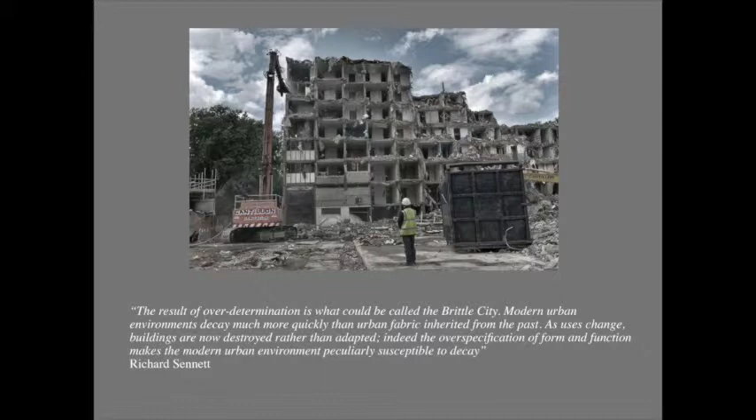So if you like, there's this restless energy, this hunger eating up the city, giving buildings that are fundamentally durable a very short life.

And because the value of the land always trumps the value of the construction on it, there's a sort of thriving trade in hypothetical constructions. What developers say is that every building is a failed development deal, because what they'd really prefer to do is buy a bit of land, get consent for a bit more than has already been consented, flip it on, and they've turned a profit. So of course the moment they dread is that pass-the-parcel moment where it actually falls on them to have to build out a scheme that has all the fantasy of the market, but not necessarily the economic basis to happen.

So, London, you could zone large areas of London. It's this sort of opportunistic model where there's no rules. If you work in France or in Spain, they give you the gabarit, this theoretical volume, or the plot ratio, what you can put there. Here it's whatever you can kind of blag, whatever you can persuade.

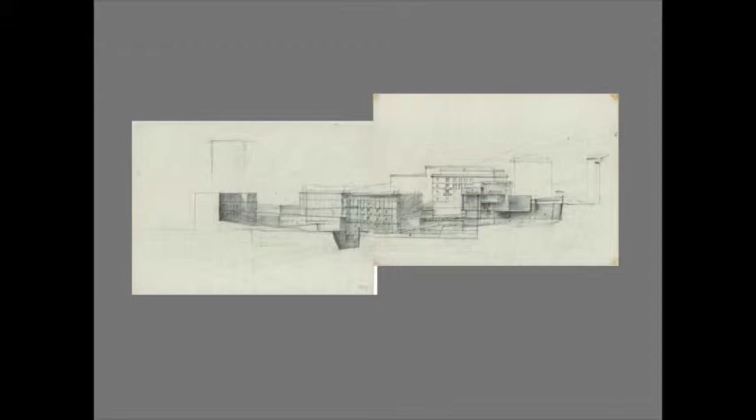In sleepy, semi-detached Cambridge, Dalibor Vesely, exile from Prague, made us believe in the city as a kind of vessel of common culture, and in this idea of architecture as a vehicle of city-making, and this sort of power of the intangible, of the cultural.

On a year's exchange in Harvard, I had this abrupt encounter with a kind of Mediterranean rationalism through Rafael Moneo, preaching this metaphysics of structure.

I had one particularly humiliating crit where he made me pin my plans up. I'd made the mistake of doing them on trace, and he made me pin them over each other. My columns didn't line up, and I had a clever answer - I said, there's a transfer structure.

And he said - which was actually a bit of a refrain from my time in Harvard - you cannot do this. He said you cannot treat structure as decor, which is certainly a habit I'd absolutely imbued from Cambridge. I've never forgotten that lesson. I think it was a fairly Jesuitical education for an Englishman.

And then graduating in the teeth of the 1990s recession spared me, I suppose, the illusion that I could translate some easy dream of the European city within the confines of London's architectural world.

I ended up doing odd jobs in archaeology, digging at the city that Akhenaten built, Amarna. He built it in 4 years when he decided that Egypt should be monotheistic.

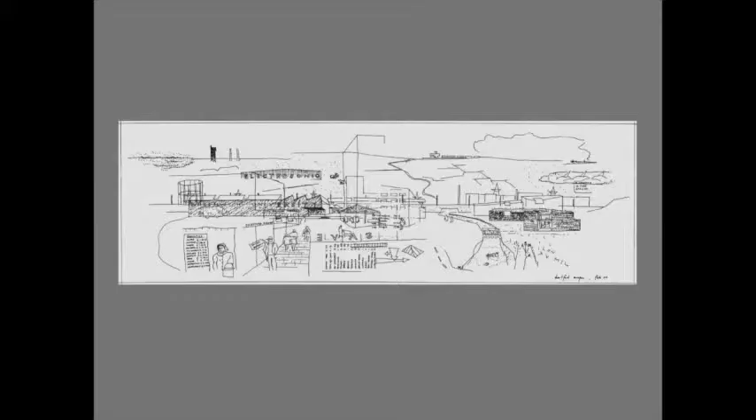I suppose our first projects—this was the first Europan project we did, in Dartford. We won it, and then we went to meet the local authority in great excitement, and they said, 'Do you know who owns the site?'

These were real kind of responses to this. They were going to build a university, an extension of the University of Greenwich, on the old Joyce Green Mental Hospital out in the marshes. So we said, oh no, put it right there in the centre.

There's this idea of reimagining the station, reimagining the life of the town, relocating the town hall off its plinth beside the station into the market square, and then a bit of housing on the side by the river as well. So it was this robust and pretty ambitious response to rather febrile settings—just a sort of crappy, neglected town with sheds—so it's a bit of a tightrope.

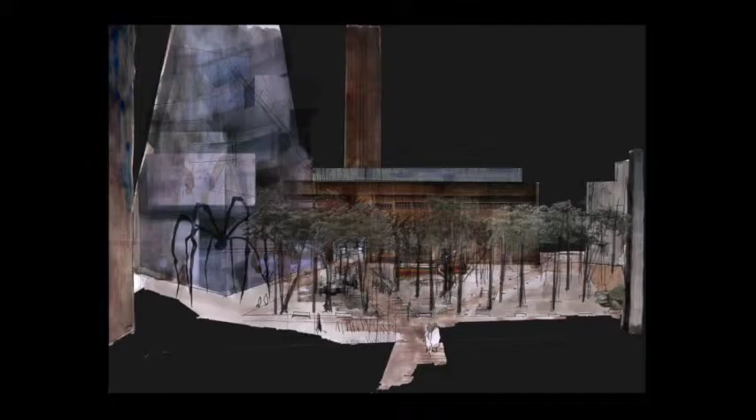A kind of prefiguration—so rather than being an empty plaza in front of the Tate Modern, the idea that this would be almost like full, and that the turbine hall space, this amazing void where installation pieces are placed, that's the public space.

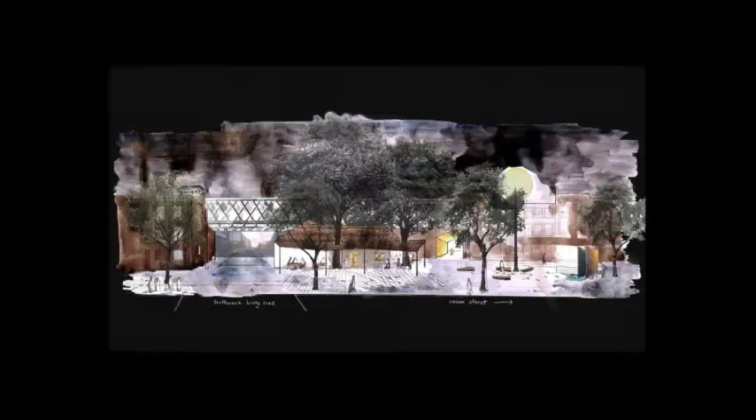Proposal for the viaduct arches to become a combination of small business space and small-scale cultural programme. And then this project for a little neglected, leftover triangle of space, carved by the railway viaduct, which you can see in the background.

The Victorians were so terrified of any form of public gathering. I think actually public gathering was banned between 1848 and 1871 or something, and that's the significance of Speaker's Corner—it was the only place where you were able to gather and speak your mind.

Their way of avoiding having any public space was to build little public toilets and tank traps and monuments, and that's why the fountains are there in Trafalgar Square, to make it harder to have demonstrations there. So this little public toilet building was a legacy of that regressive project.

It's since become a cafe, and it's got these two magnificent plane trees growing up through it. Our project was an element of taking over, closing a road, opening up the public space, and then a little canopy—this fantasy, this capriccio of the cafe as a kind of woodland hut.

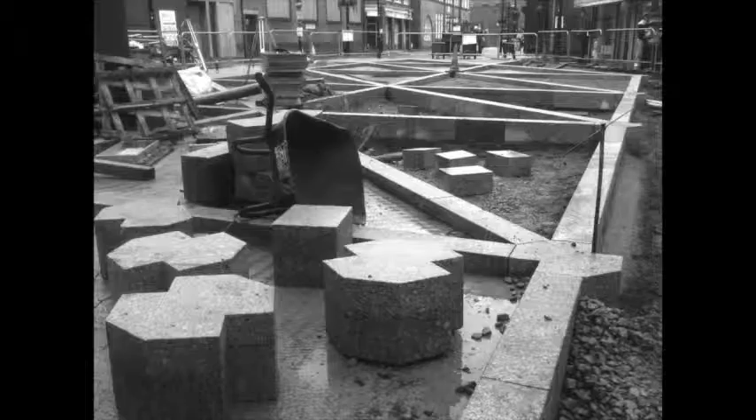Translating this—I suppose it's the geometry of the space, the geometry of the viaduct—these echoes into this diagonal grid that structures the paving of the space.

I suppose there's an element here of negotiation with people, and of course negotiation with the material and the physical. But there comes a moment where you can't just be defined by everything around you. It's then this sort of moment, you need to find a moment of strength. And you can see here, if you want to make a durable public landscape, stuff has to lock together.

It's not an assembly, it's not an Airfix kit or a kind of Meccano set that you bolt together and it's strong. Actually, you have to sculpt and craft things if they're going to be strong and durable.

And these figure-of-eight pieces are the kind of place where this geometry, this responsive, moderately supple idea, actually turns into something that has a strength and integrity of its own. We've realised, if you like, two parts out of the four parts of the project.

The paving and the canopy - I've done them in, I think, two completely separate years even, which still leaves a bit of the light and the public seating to build.

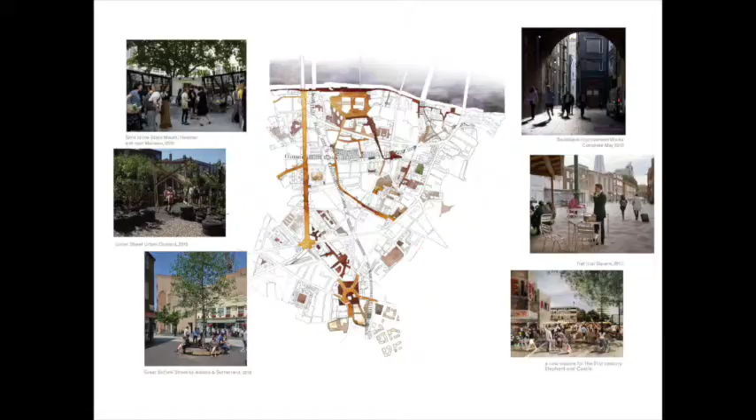And we've struggled to find a name for this approach. We've used incrementalism, but someone said, well, that's already identified with a kind of practice in the third world, or other things. You could talk about negotiation and the imagination, but then it all gets pretty tangled. The danger is it all sounds like it's just sort of moderation, and we just sit there and moderate and arbitrate and make people tea, and then the project happens.

It isn't like that. There is this sort of element of suppleness and bending over backwards - that's the spineless bit. But there is also this element where you push, and you've got this many constraints, and it has to take on a kind of force and a strength and an integrity. So which is where I kind of turn to the Sage of Springfield, and I think the best definition of what we're trying to do, how we do it, both in human terms, in social terms, and in physical terms - it's feisty but spineless.

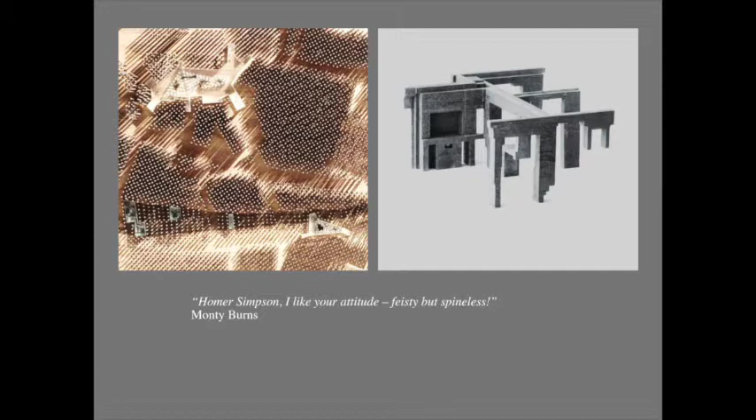And I suppose this is probably then perhaps the ideal kind of skill set - London has been our playground and our school, where we've learned to transform what we found, and turn its formlessness into strength, but also taught us - we've learned the lesson how not to be bullied by the English establishment, which was a very valuable skill when we came to build the castle.

It looks like this sort of pastoral England, beautifully escapist, uber English.

And that's the sort of elegiac tradition of English ruins. I mean, pretty much all of them, the ruined abbeys and ruined castles, and this has got one of each, are the result of a kind of ruthless and powerful process of state formation.

This parish church is the remaining quarter of a chantry church established by the Grey family and dissolved by Henry VIII. They ripped off the lead roofs and sold the lead. The nave stood for another 50 years, and then someone just thought, well, this isn't going anywhere, and pulled it down and built a small tower.

So that's why it has this strange proportion, very tall for a short parish church. That comes from that act of wanton destruction and Henry's centralisation of the state and sidelining of the church as any kind of rival power, economic power or authority.

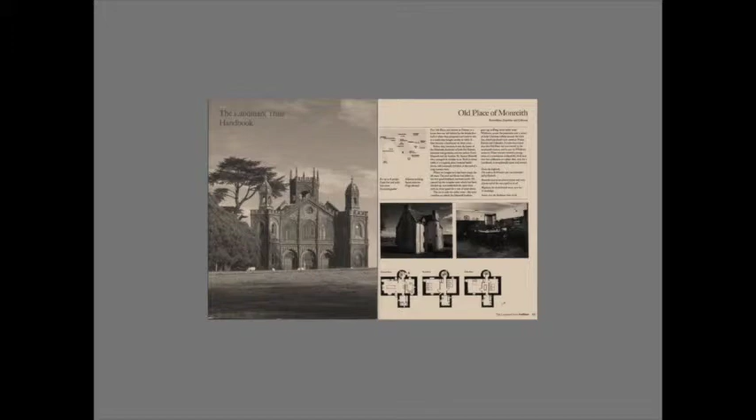Some people say, okay, this is like holiday housing for posh people. Landmark Trust would say it's about £30 a head per night if you fill every bed. It's actually a very congenial and interesting way to share a historic experience with friends and family.

This is just to spin you through the evolution of the castle. So it started off with this sort of keep, a fortified manor at the end—probably the beginning of the Norman period, with 2 metre thick walls.

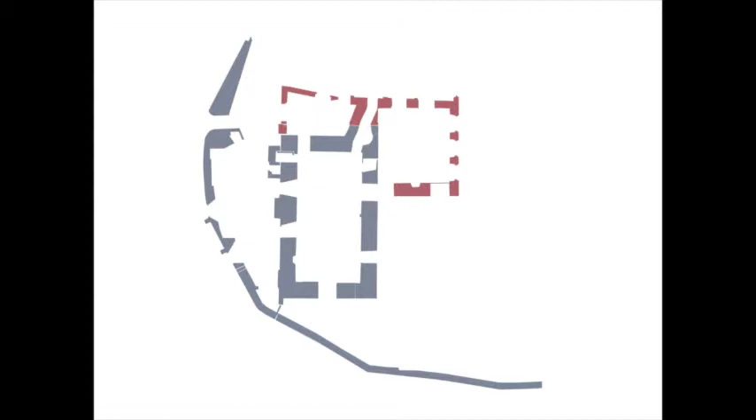This is the extension by the Grey family in the 15th century, sort of Gothic, then added to in the 17th century by the Chamberlain family who took it over. One part is more in the Elizabethan prodigy house style, and the bit to the north was all half-timbered, jettied construction.

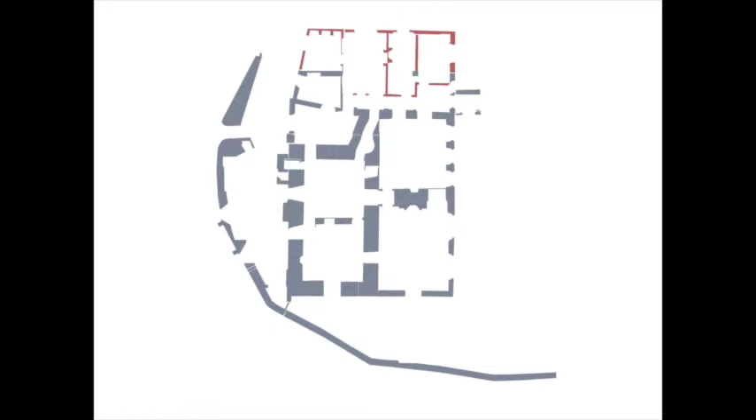People liked having long galleries then—it was very fashionable. So they built this half-timbered, cantilevered glazed gallery, which, as you'd probably not be surprised, was in very poor condition when we found it. This part here is an expansion from the 19th century.

And when we came to it, it was this sort of empty shell, and we focused our brief on a 4-bedroom house, big enough to fill about a third of the castle. We took the decision, fundamentally in a spirit of continuity, that the core from which it had grown would be the core that we would inhabit.

It had bloody big gashes in it, these giant gaping holes. We built a sketch model and tried it out, and you can see the scale of the 15th and 17th century wings is much more congenial to living in. But we just felt no, that continuity, that core trumps everything. So that's where we located.

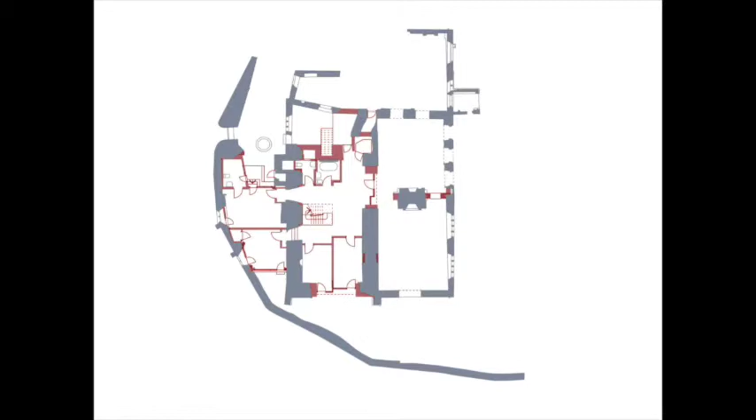And as you can see, the bedrooms and bathrooms are on the ground floor, and then we take a big hall on the first floor for living, dining and kitchen.

This is sort of more or less what we found, in the sense it was almost fully intact in places. This kind of proud silhouette, this very kind of clear structure. These sort of strange orphaned structures, and remember that fireplace because you'll see it again.

Orphaned, and I think actually our first response was to knock it down in the competition scheme, which couldn't really see its point or what it was. And someone asked us, took us aside and said, perhaps you could reconsider that. I think it's quite important.

You can see just this sort of, I don't know, where does the brick stop or the stone stop and the rubble start, or where does the ashlar stop and the rubble start, and where does the rubble stop and just a sort of mud and debris.

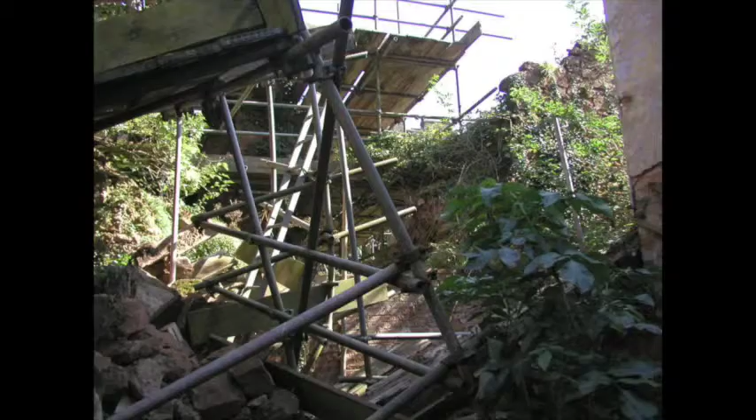Something that, you looked at it from one angle and it was a ruin in the grand tradition. You looked at another angle, it's just a sort of chaotic pile of stones. And this is actually as we found it.

So, in a way, what we've done, which I'll come to, has this wonderful quality of feeling self-evident. It wasn't at all self-evident. That's what I'd like to say.

We had this sort of grappling, teetering kind of chaos that we had to first imagine cleared, opened up. To make it safe, we had to demolish quite a lot. To demolish, we had to have planning permission. To have planning permission, we had to do a scheme.

So we had to do a scheme on kind of sketchy knowledge of the detail, and I have to say, to their great credit, the heritage bodies consented this sketchy scheme and allowed us to evolve it and refine it and respond as we went along, rather than forcing us to build what we had consented, because that wouldn't have been great.

We, in this sort of ruptured tradition of continuity, evoked some Mediterranean references, which, because they weren't party to this, weren't part of this focus on restoration for the Landmark Trust, this seemed, even just pulling these pictures out of books, quite fresh to them. This idea that actually these things, the centuries, could just coexist comfortably and directly.

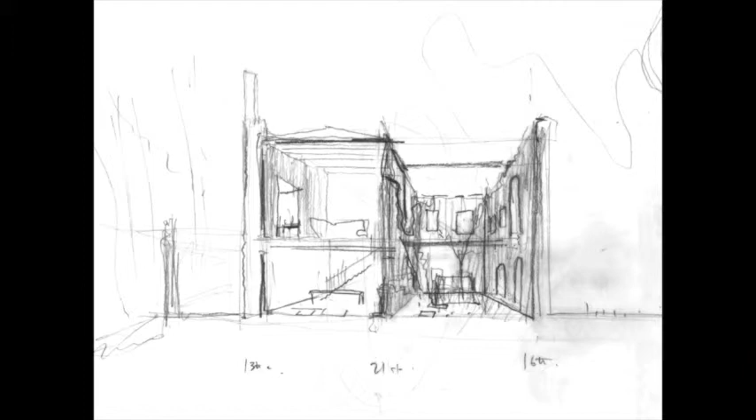Our initial idea was you put almost half a house, a house in half of the castle, you occupy that oldest part, and then the newer 15th and 17th century parts, you leave open to the sky as kind of open courts.

That evolved into this. This is then just a working model, sketching over it, just starting to imagine, not just the textures of it, but the rhythms of life in it.

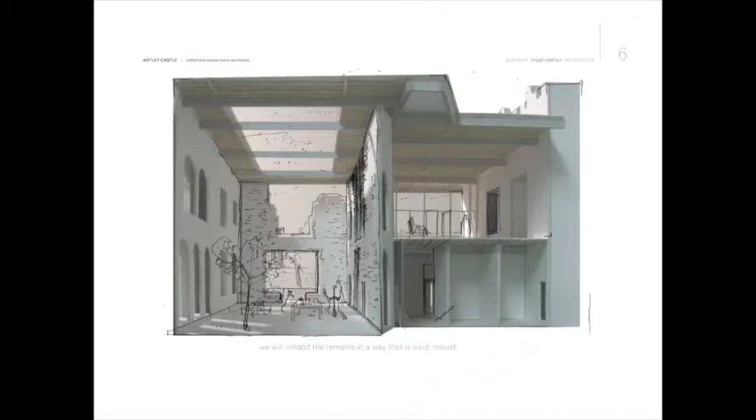This idea of that as a courtyard where you dine, which would actually have these shafts of sunlight coming through it. This idea that we'd actually, which came from our structural engineer, he said, if you want to protect it, you should roof it. I said, I can't roof it, it must be really horribly gloomy. So we settled on partially roofing, like a cornice, keep the weather off the walls, but then actually bind it. And this was initially the idea of doing that with concrete beams.

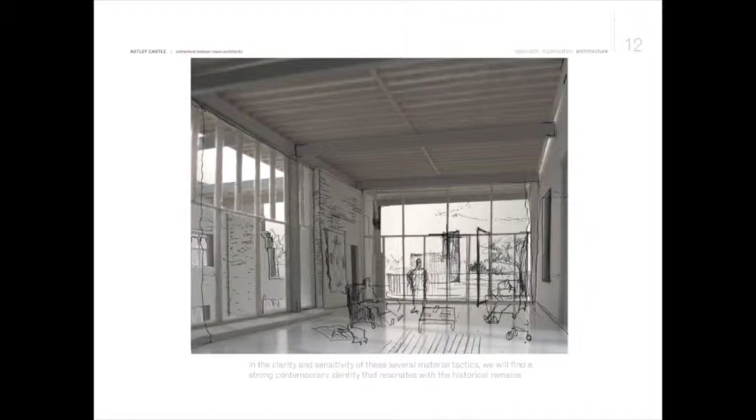And this idea of that first floor hall, again, as this big, messy, tolerant space, child scribbling on the floor, the sense that actually it would be, I suppose, where the medieval idea of living and the modern idea of living kind of come and approximate each other again.

So the scheme as we presented at a competition, which in many ways didn't change a lot, but in the ways it changed profoundly.

So if you like, we were having to almost mentally undress the ruin, clear away this rubble in order to come to a kind of proposition.

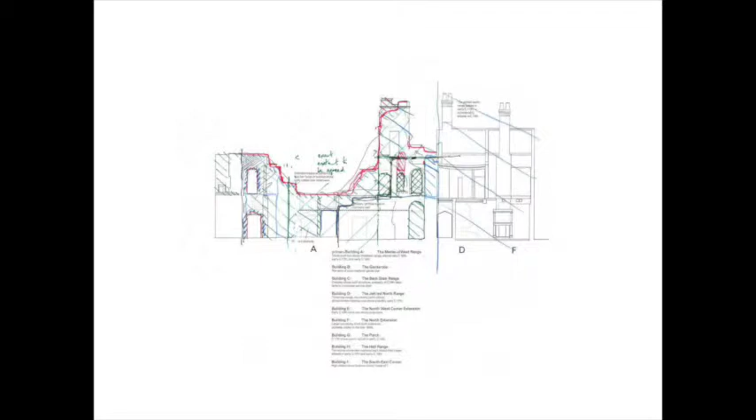This fundamental idea that the new construction would stabilise, would buttress and tie the new construction to the existing construction. And this is in its simplest form, almost just a sort of concrete T that just binds this rotten tooth together.

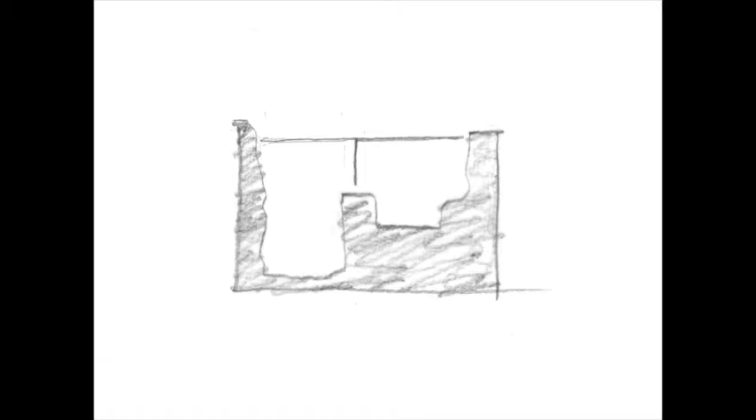And it was strange because it was exactly this, the fact that then the past was dependent on the present that gave us our real kind of liberty. Because normally it's a question of what am I allowed to do? We've had conservation officers doing a drawing and saying that's what I'll let you do on other projects. Here, both because they were desperate and they knew it was about to fall down, and because the past was dependent on the present, we had a totally different setup, totally different kind of liberty to actually reflect on what the integrity of this thing was.

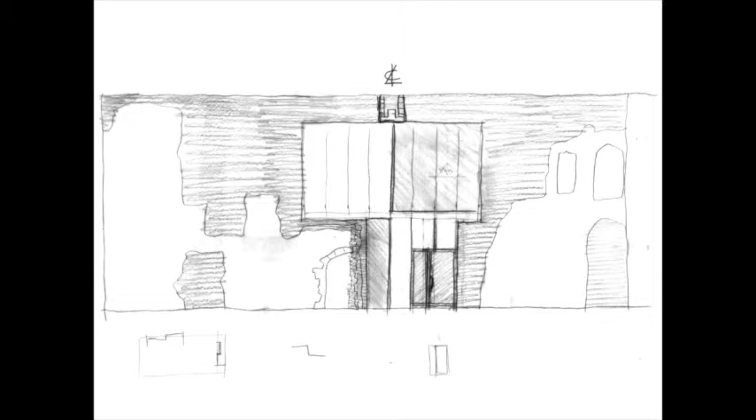So it became a kind of question of negotiating, not negotiating with other people, but negotiating these found conditions, a kind of random broken edge here, a remnant of an arch there, a collapsed wall here, and finding something where the principle was we do as little as possible. We build as little new construction as possible, but nonetheless that finds, it's almost a struggle with formlessness. And the answer is not some strong form.

The answer we proposed was something in between, something that's got that kind of hybrid, complex form. This is a question of negotiating even just plumb, what's vertical? The walls are doing this. And this question of, which for probably about 3 years we ignored, we didn't even think of. And then suddenly we were on site and having to say exactly which line we're going to put the walls in.

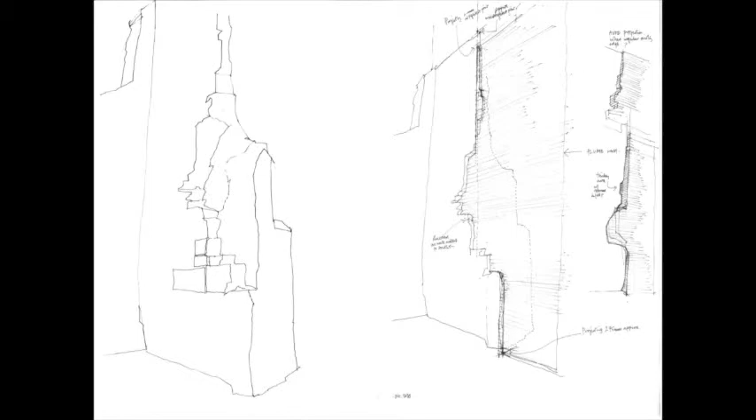So coming up with the principle that the brick always sits behind. We did look at the idea of actually the brick following the walls. So negotiating, I suppose, yes, and then these sketchy, blobby people, a primitive form, but a kind of powerful form of empathy, trying to imagine.

So it's not all, there's an element of structure, there's an element of diagram, but there's an element of experience. You have a memory, you have these memories of staying in places of shared living, and just trying to imagine these moments of empathy, trying to understand how an atmosphere, a behaviour, and a kind of texture start to reinforce each other.

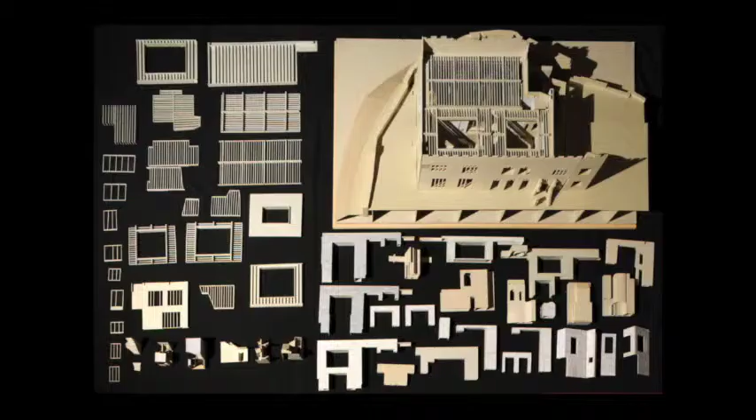This sort of slightly pathetic array of the graveyard of failed options and things we explored. But I suppose what I'd say is, we negotiated it through drawings and models. Drawings, for me, are a thought in action. You think it, you have a blank piece of paper, you don't get some sort of CAD file.

That has 65 layers and 10 times as much information as you need. You start off with a kind of absolute minimum, and then with this economy of the line, you can find it. You find an idea, and that's what's in each of those preceding drawings. The model, however, is a fantastic tool for testing, and that's exactly what we did with this.

I wonder what we spent 5 years doing, but a lot of the time we spent arguing about how the solution that worked in this place would find a corollary or appropriate family resemblance in another place. It would never be a question of finding one system, one answer that fits all. Every moment we felt we'd nailed it, you'd come across a new question. It's a dialogue, a negotiation between different approaches and personalities, but also a dialectic through which we worked with all this concrete material, these friable edges and weird geometries, trying to turn that into something with coherence and deliberateness.

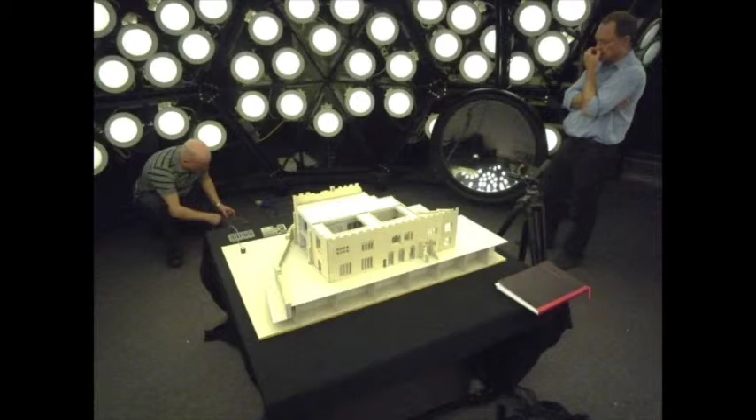We took the model to the artificial sky at University College London, attached a lot of diodes—it was like taking it into an operating theatre, wires and diodes attached—and measured how much light there would be in various spaces, what the daylight factor would be. It was actually very useful; the numbers were moderately useful. We could say, okay, there's a daylight factor of 5 in the hall.

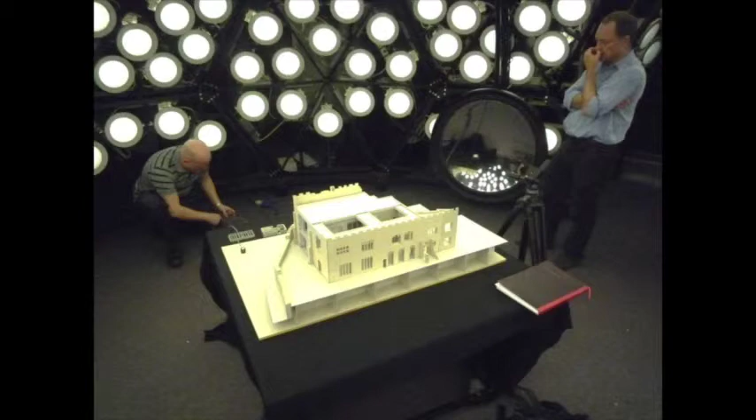Don't worry, it won't be gloomy. It's a castle—what do you expect? Castles are meant to be gloomy. But we managed to offer some reassurance with, I don't know, you might call it pseudoscience. What was actually very interesting was having the technician's knowledge of daylight—that's the difference between a software model and doing it in person. He talked about transitions and the grades by which the human eye adjusts between different light levels. You don't want abrupt transitions. So we came to the view that maybe these partially roofed courts would ease that transition from bright sky into gloomy interior, rather than hindering it.

In a way, it's like building a modernist patio house with an ancient Gothic brise-soleil. We realized that because we had a house at the core with this perforated wall around it, it would just be like a giant sundial, with the light animating and stirring this collage of the centuries.

We used the model to test finishes—the 1 to 50 model finishes, the detail. We recorded this in a book.

Having worked enough for the English establishment, we realized we had to give chapter and verse—tell them exactly what they were getting, exactly where, and exactly why. Rather than being hit by a wall of rejection—why aren't you using oak, why aren't you using veneer, why don't we paint the walls—we anticipated that and used these images. Then they'd say, oh, but you've left off a beading there, it's very important you put that on. They thought it was some fancy computer model; they didn't realize it was just a crude old model you could stick your head into. But it did the job.

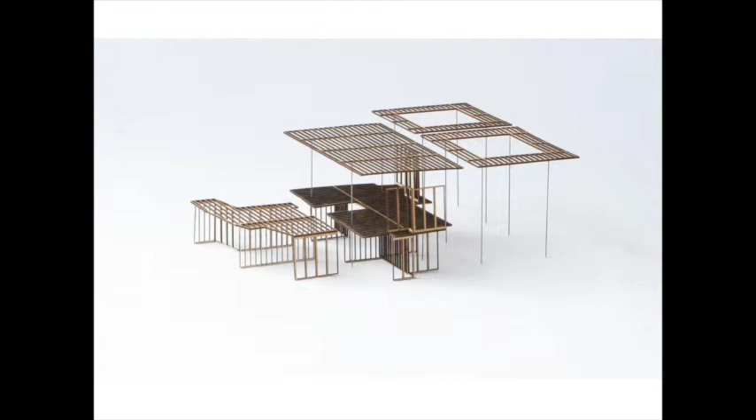So where the kind of masonry armature keeps it sublime, keeps it ruinous, keeps it kind of these big gashes, it's the job of the carpentry and the joinery to kind of give it measure and warmth.

We selected a Danish brick because they could deliver. They're 35 millimetres high, so very fine, like a kind of Roman tile brick. We tried out another one which even we quite liked the colour of, possibly even more, and it came in 45 millimetre modules, and even that 10 millimetre difference was very strongly palpable in that encounter with broken edges.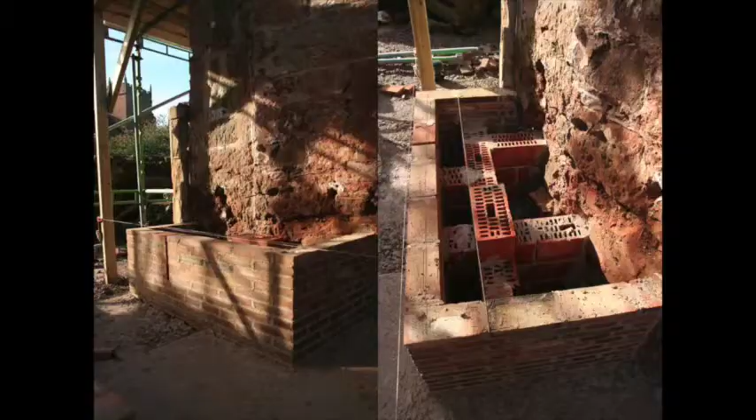So I suppose you have to make a decision based on a couple of dozen bricks piled up against the edge. But I tell you what, it's a lot better than thinking you can make that decision based on a bit of paper back in your comfortable office. So there was a lot of testing on site that we went through to explore the decisions, or to underpin the decisions.

We did a sample panel of the brickwork before. This is actually one of the first piers going up, so you can see it's like a honeycomb, hollow, but with a series of clay block diaphragms, and inside this is, I think, Belgian snelbouwsteen, fast building stone clay blocks.

We chose that because concrete and brick expand differently, so we wanted to have a greater thermal consistency. So they are these sort of hollow, deep but strong elements, backfilled with aggregate to bind them back to the existing broken edges.

The diaphragms are bonded in every 5th course or something, so these headers — here, this seam of headers is where the diaphragm is bonded into the facework.

It's a quarter lap bond. A Dutch architect wrote to us and told us what it's called, but we said, oh, is it really? We just sort of drew it until it looked like it worked, and we drew a lot of different variants of it. I think we called it a Flemish garden wall bond or something, which I don't think exists.

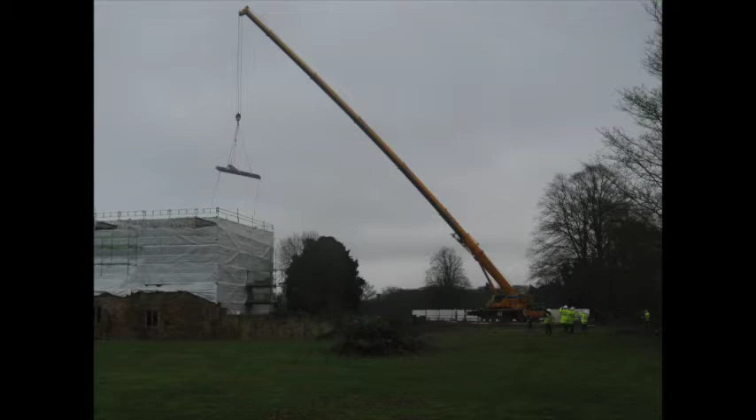So this is the lintel. Of course, there's a moat, so you can't just crane stuff in very easily. So this is a temporary crane at the limit of its capacity. I think Chris did the calculations several times and certainly spent several hours on the phone trying to persuade these people that they could in fact do it.

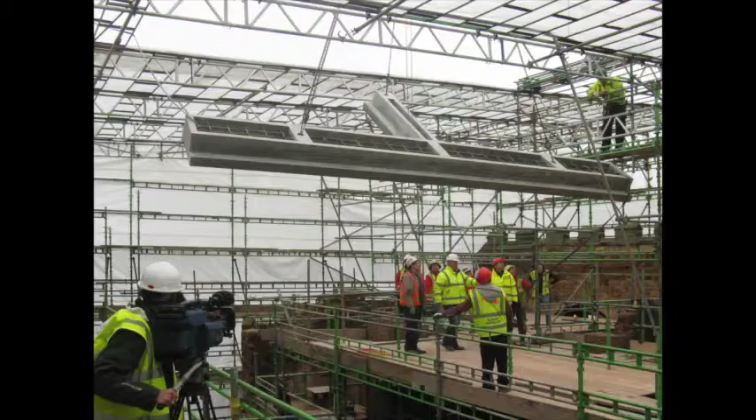It's a hollow lintel, you can see the kind of ribs, so it's basically almost like permanent formwork. It's a 7.5 metre long concrete lintel at full stretch in order to keep these gashes, with the BBC West Midlands cameraman in the foreground there. And that's the bit that, if you like, ties the heart of the house together.

The lintels bearing on other lintels, or beams bearing on other beams, it's very much a motif of Paul Robbrecht's work, Robbrecht en Daem's work. When we were finishing the Whitechapel, we were detailing and refining this project, and we would go around, and I suppose we realised what he had done on this project.

These sort of very simple rooms, each with this powerful kind of transgressive gesture. There's one — my favourite gallery is the first floor gallery where there's just a doorway punched into the corner of the room, so it goes around that corner and goes through.

You can't hang works there because it's the corner, and it's a sort of beautifully subversive gesture. It kind of attacks the architecture and encourages this diagonal movement. So reflecting on this, I kind of built up a whole idea that this was Paul and Hilde working with this idea of Gordon Matta-Clark and his attack on architecture, and I got very carried away with this, and we ended up with this solution.

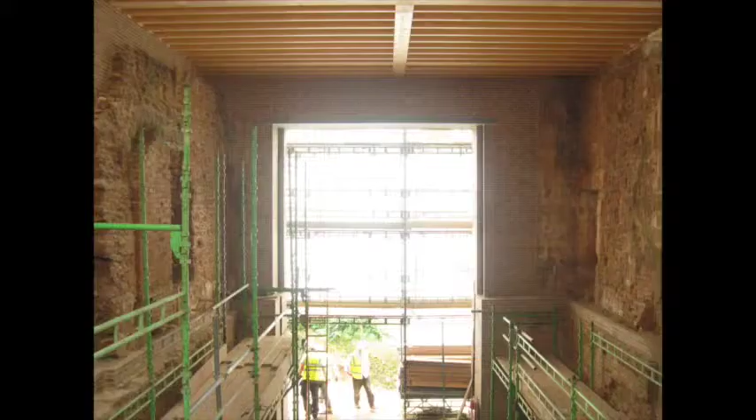So keeping this sublime scale with this masonry construction, these big concrete lintels, a dozen conditions where I suppose this sublime scale isn't appropriate.

Top left, the lift opening. In the middle, the kitchen, how you fit a kitchen in a big medieval hall. This is an idea of a medieval fireplace, where you have the hearth and the range, translated into a kind of diaphragm construction.

This is actually like a cantilever staircase, so each lintel bears on each other. The engineer came back to us with a lintel bearing on the next diaphragm, and then this little bit of fakey cool brickwork, and we said no, it's got to work. It's got to actually carry the weight, otherwise we don't want to do it.

So this thing, on the one hand, it's a very clear, simple structure. On the other hand, every encounter, every junction requires a modicum of improvisation.

Even including when we were on site, finding out how you fit a window into what at first pass, in the gloom and rain, had looked like a passable window opening - and it isn't.

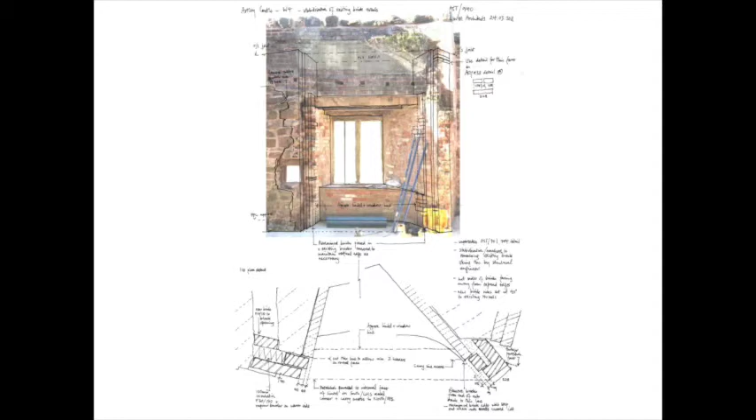And this is when we even started using reclaimed bricks, because our bricks were not the same size as some of the Victorian bricks. So using reclaimed bricks and the like to patch, repair and bind this whole language, if you like, of almost Baltic Gothic. It's got nothing to do with the history of Astley, but it's a kind of intuitive response.

We didn't order any special bricks, and so that actually forced us into this whole world of, like I say, improvised Baltic Gothic.

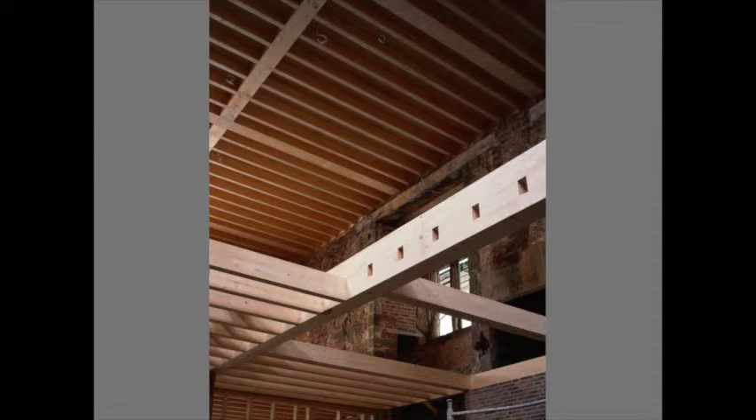The carpentry is, like I say, what gives the house measure and warmth. Someone sold it to a funder saying oh, we're going to do it all in oak. We said no, don't say that, we can't afford it and we don't want to do it. We actually welcomed the chance to do it in - so this is laminated pine, pretty bog standard.

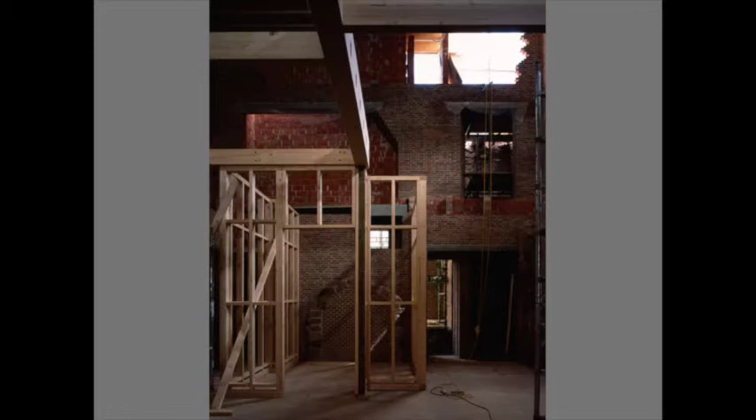What's worth pointing out here is that you see the central beams in upstand, so it's the strongest elements, and also the roof, which is just to do with levels. But doing the carpentry in upstand, the primary structure in upstand, means it's all got this tautness, this lightness. So, like that hollow beam, hollow lintel, the carpentry also slightly conceals its work, its strength, even though it is absolutely doing that work.

This is then the partitions dividing up the space, forming the bathrooms, bedrooms, all in stud work.

If you've got a fine bond, the brickwork accommodates itself. So this idea is kind of counterintuitive - that it's the carpentry and joinery that is the repetitive, almost industrial assembled component.

Taken through into the stair, then a kind of stud enclosure, open. Obviously it becomes hybrid, because if it was fully stud work, you'd have a whole set of studs on the middle as well. It's kind of a spiral, 3 flights up to the top, incredibly constrained. We'd originally had the stair out of the house in the old location of the spiral stair, and this is almost like a second living room.

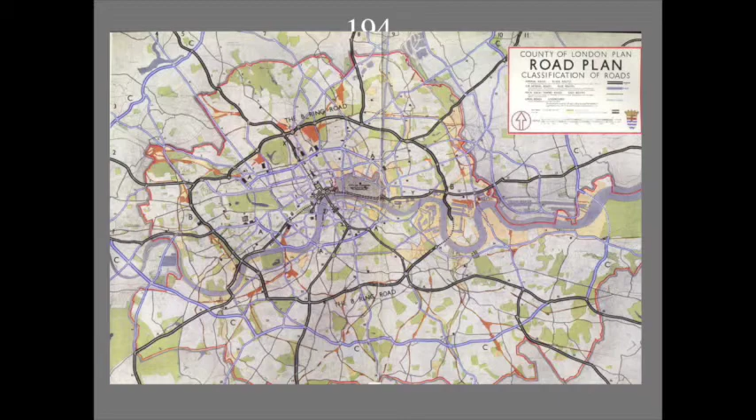The Abercrombie Plan, this progressive project for London, identified it as this nexus, this node in London's road network - is this the pointer? Yes, there, bingo - which then obviously legitimated further massive destruction.

This sort of idea of, I don't know what to call it, is this a public space, is it a plaza, with towers at either end - some modernist idea of a public space, but it's got a hell of a lot of traffic coming through it.

Erno Goldfinger, another exile, Hungarian, studied under Auguste Perret in Paris. This fantastic block, Alexander Fleming House, on the eastern side of the Elephant and Castle.

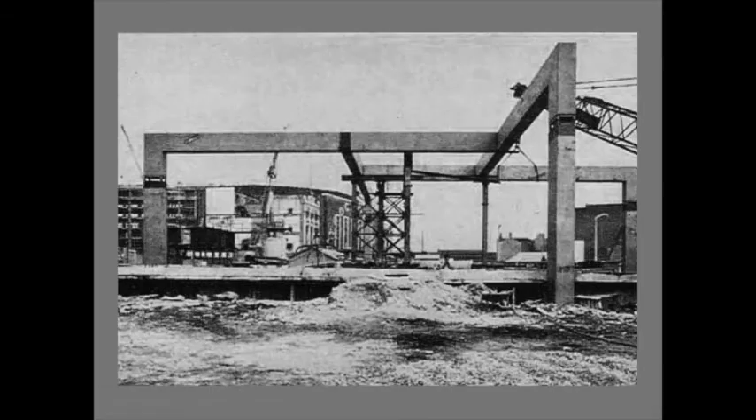The Faraday Memorial, a kind of monument to the scientist and his discoveries in the field of electricity, which also happens to house the Northern line transformers. This strange, modernist, indeterminate structure, this sort of pinwheel of T-beams, before us and before Paul.

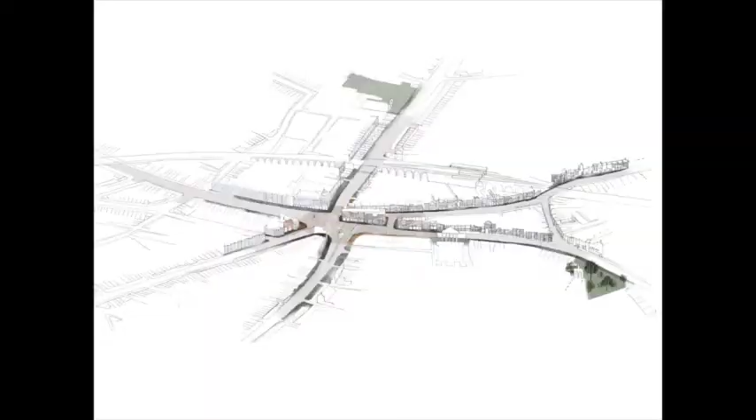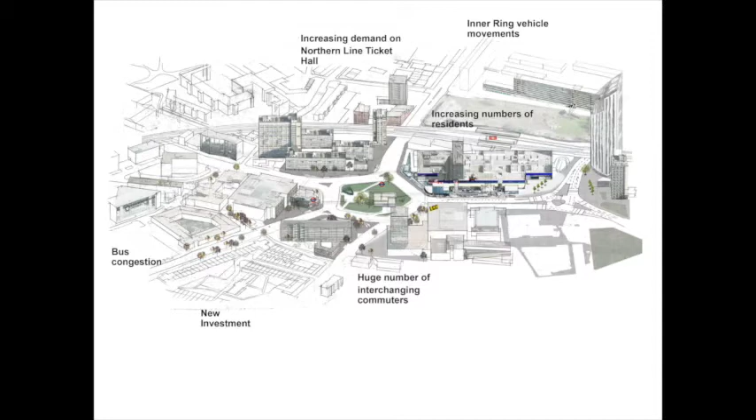A quick sketch of its evolution—this Piccadilly Circus of the South, a kind of medieval crossroads, this big roundabout with these blocks, but with a sense of generosity and progressive ambition.

So what we've proposed—this is the movement—is, as the road, and this is a sort of road scheme at one level, but we reclaim this large area of public realm, of pavement. Public realm is what we have to try and make it.

It becomes a peninsula. The traffic comes around it. The underground stations actually come up and meet it. We build this, and we try to relate both of these.

This is a sort of relic of the Victorian era, and this is the modernist relic. This is the Heygate estate that's being ripped down, with 79 social homes provided.

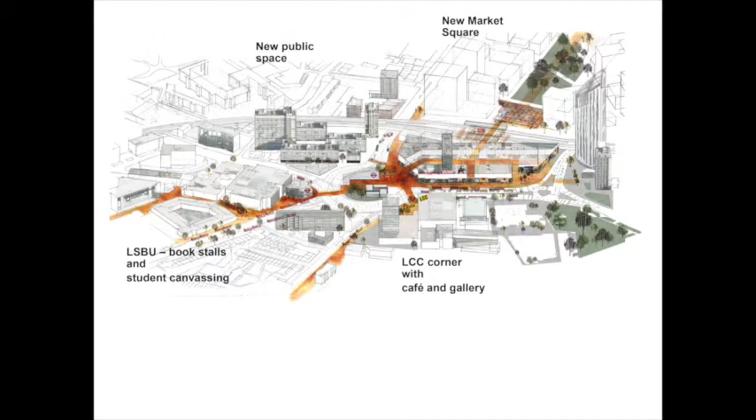Stephen spent months in negotiations, being, I suppose, spineless in public and feisty in private—although I'm sure he's never entirely spineless. But going along with everyone's interests, absorbing all of them, part of what we do is defer decisions as long as possible in terms of design.

That's like the castle. One of the keys we find to working in public is to show as little as possible at the early stages, wait till everyone else shows their hands, and then you can negotiate—you can't without putting your feet in it.

So this is then, after all this sort of spinelessness and absorbing everyone's ambitions and pressures and whatever, we finally came up with this ambition and pushed back, became feisty.

This idea that you'd relate to Alexander Fleming House, and then the London College of Communication, a university, on the edge of it. The South Bank University is also here.

The shopping centre, which will be demolished anyway, should be formed to actually be part of this public space. We called it a 21st century London Square—so we're learning the kind of bullshit you need to sell this stuff. But it's a square.

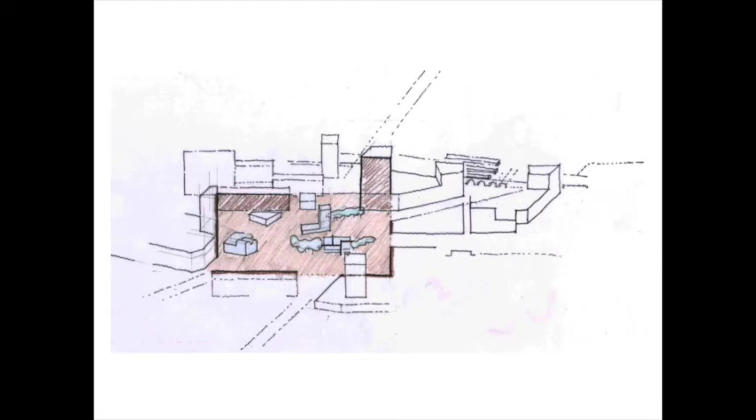So this idea that you keep these remnants of kind of futures past and add to them with new pavilions, as part of a landscape of small pavilions defined within this larger block of the New London Square. This is the image that the Transport for London team called 'London's Burning.'

Which was our attempt to do the kind of CGI hard sell, but which sketches out this idea of a public space that's part inherited, part projected, where you can't tell the difference between what's always been there and what has just been added, where there isn't some grand big narrative about what the public is. There are collections, there are corners—we accept this fragmentation of the public in a fragmented public realm.

So, yes, we've tried taking this sort of full contact with inherited structures on the road, and it's met with mixed success. But—

You'd have heard all the talk of the Grexit, the Greek exit from the euro. There's obviously much talk of Brexit, Britain's exit from the whole European Union. We'd have killed to have won any of those competitions, but we are actually delighted to stay in London and fight our corner, fighting for this idea of continuity and transformation rather than creative destruction.